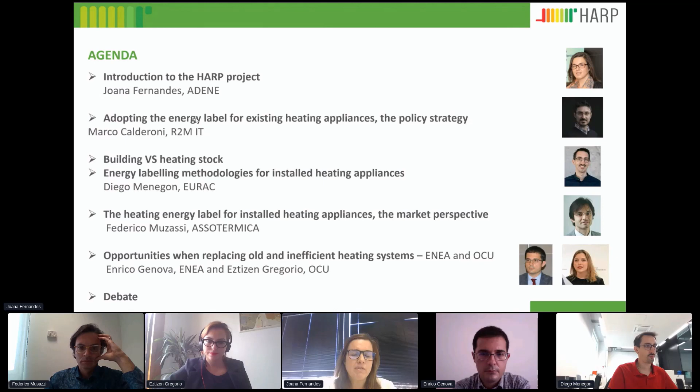After me, Marco Calderoni, who I hope can join us as well, or hopefully he's already in the chat. I can't see his face, but hopefully he's from R2M, so he knows how to manage around this online seminar. He will present the policy framework behind the adoption of a label for existing appliances. There you have it. Ciao, Marco.

After Marco, we'll have from EURAC, Diego Menegon, who will present two slots. He will present the work that EURAC did regarding the evaluation of the current building and heating stock at EU level, and then present the HARP methodology for labeling existing appliances, both space heating, water heating, and combi systems. Upon EURAC's presentation, we'll have with us Federico Muzassi from Assotermica, presenting the market perspectives from an industry association point of view.

And how the label for existing appliances can further promote and boost the market and the rate of replacement of existing old and inefficient heating appliances. Upon that, OCU, a consumer association from Spain, with Eztizen Gregorio and Enrico Genova from the Italian Energy Agency, will share the floor to present some of the opportunities consumers have when replacing old and inefficient systems, from a perspective of how to raise consumers' awareness, and then also the incentives in place, in this case specifically in Italy, that also support consumers to take action and replace their heating system.

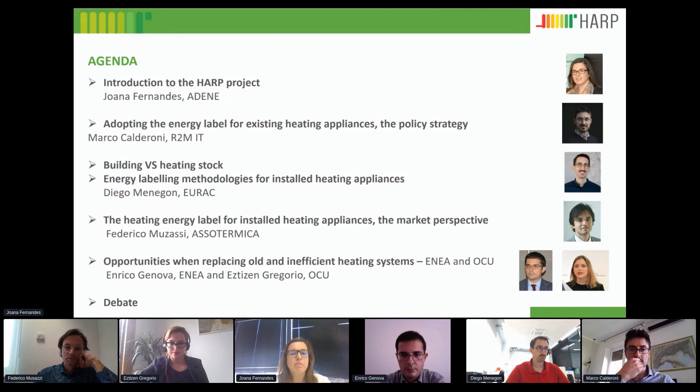So I will briefly present the HARP project. As I said, the HARP project basically is aligned with the EU strategy, with the climate package, and for having a strong activity and a strong action regarding the greening of buildings, and how we could not only work towards more efficient buildings, new efficient buildings, but also work with the large built patrimony that we already have.

And that is here, it's our stock, it's our identity, it's our patrimony, and we should also look into strategies to make this stock more efficient. So we already have several policy instruments in the market at the EU level that work towards this goal. We have the Energy Performance of Buildings Directive, which is in place in all EU countries, and of course assesses the energy performance of buildings. We have the renovation wave, a clear driver for the energy transition.

Long-term renovation strategies is also part of the packages, and most EU countries already have in place long-term renovation strategies for their buildings on how to tackle deep renovation in both residential and commercial buildings. And of course, we have the goal for nearly zero energy buildings. So the local production also has a goal that we have to meet our energy demands locally.

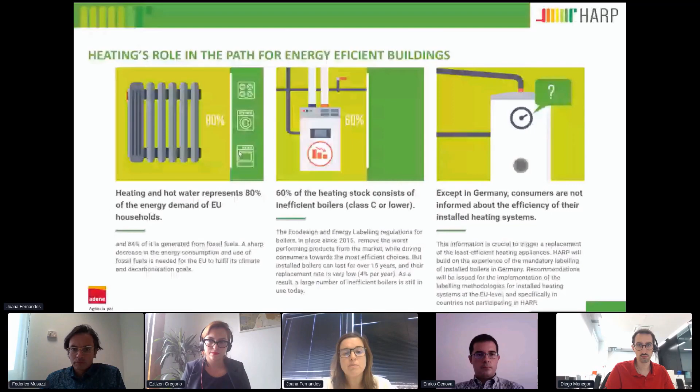So basically that is a waste of opportunity for the consumer to see what's out there, how the market has evolved, and what it offers nowadays. This is an opportunity that we don't think consumers should miss.

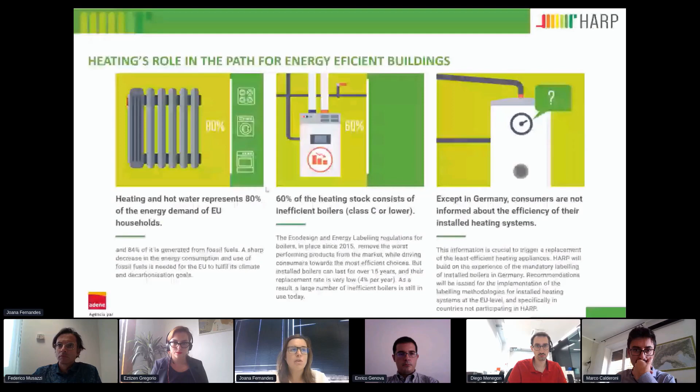For that, our efforts are towards inviting consumers to understand what they have at home. The first step of our HARP strategy is to raise awareness and to understand the consumer. In the HARP project, we had universities with us studying consumer behavior, to understand exactly what triggers consumers to think about efficient heating.

I know it's not a sexy topic, as one usually says, and it's not something that pops into your head, although we all had plenty of time to be at home in the past year and a half and tackled some issues we didn't think we were going to tackle before. But the truth is that efficient heating is not on the top of our heads at any moment.

So the first point is to raise awareness to the consumer about efficient heating, to let them know the efficiency of their current heating system, and make them aware of the possible solutions in the market to replace their heating system, analyze the benefits they can take from changing it, and of course motivate the replacement.

So put him in contact with installers, let him know which incentives exist at national level that can further support installation costs for new systems. And of course, make them aware of additional benefits that go beyond lowering your energy bill, but can also have a direct impact on the value of your house, the aesthetics of the solution, and of course your overall comfort.

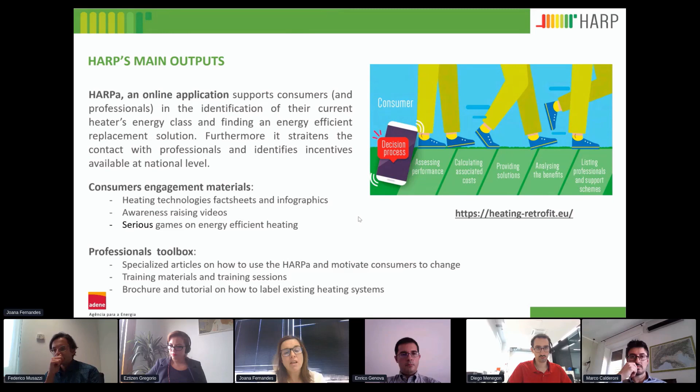We have also developed some materials for professionals to help them know how to use this methodology, how to use this application, and how to use the energy label for existing heating appliances in their business model, to support their service towards the consumer with this energy label.

We had already had one heating season during the project, and we are now entering a second heating season, and will start with the campaign very shortly. For those of you in any of the 5 participating countries, you can follow us on our partners' networks to see which activities we will be developing at the national level, because there will be public awareness in conventional media, communication with national authorities and stakeholders, social media campaigns, and of course trainings for professionals.

So what are the results we aim to achieve and work for in the HARP project? The first is, of course, the definition of methodologies that allow us to calculate the energy efficiency of existing heating appliances, and providing an energy class harmonized with the EU regulations that were published in 2013, entered into force in 2015, and are now already being revised, also in the framework of the rescale label.

These methodologies are harmonized with the EU label. That's the important message: that within the same language, within the same basis, we can talk with the consumer and present solutions that all have the same basis. We have a class for the existing system, and the same scale is used for new appliances available on the market. This is exactly one of the main outcomes of the HARP project.

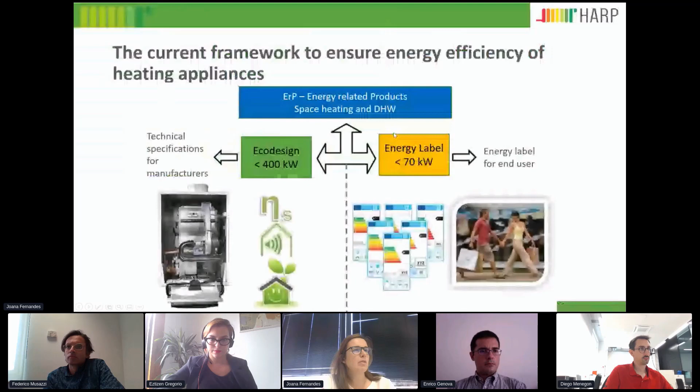Thank you, Joana. So today I will present two activities that were carried out in the plan, analyzing the building stock compared to the appliances stock, which are motivating some of the purposes of the project that Joana already explained. If you can go to the first slide. The idea of this activity was to characterize the heating appliance stock, so the installed appliances inside the countries.

That are project partners of the project HARP, named France, Germany, Italy, Portugal, and Spain, and the aggregated results of EU28. For time constraints, I will present today only the data about the European level, but in the public report you can see the results for these different countries. So the goal of this activity was to identify the most common solutions that are installed according to different building typologies. Therefore, we analyzed the stock in terms of age, capacity, efficiency, and expected energy class, and so on.

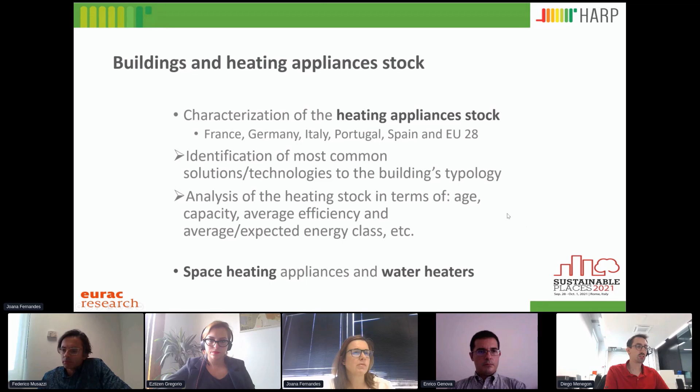We consider the space heating appliances and also the water heaters. Next, please. Okay, so if we look at the EU28, this data was taken from the deliverable that was written 1.5 years ago, so the statistics are not updated to 2021, but are some years old. In Europe, there are 500 million citizens with 22 billion square meters of residential area. On average, in Europe, 80% of the surface area is heated.

This statistic is really different if we look at warmer countries versus colder countries. For northern countries, the percentage is close to 100, and in Mediterranean regions, this percentage is much lower. This area is divided into 250 million dwellings, and let's say half are single-family houses and half are multi-family houses. The heated area in this case depends on the kind of houses. A really big percentage of buildings were built before 1980, so the thermal load can be important for this building stock.

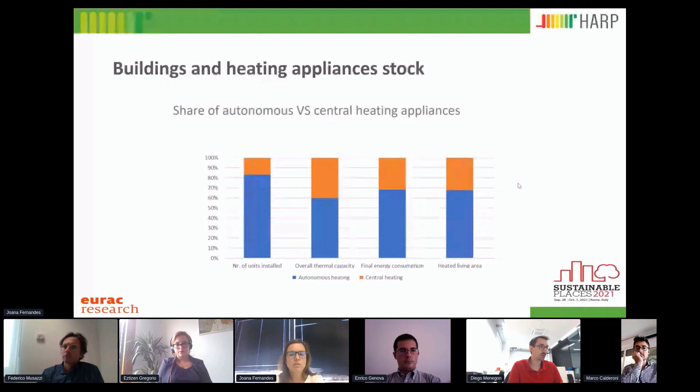So before we spoke about the overall number, and now we make an additional step. We need to understand how these appliances were installed in terms of autonomous heating or central heating, because the purpose of this project is to motivate the consumer. In the case of an autonomous heating system, the user is responsible for replacing an old and inefficient appliance, while in central heating there is a condominium administrator or some other person in charge. We see that the biggest share is installed in autonomous heating systems, which also corresponds to smaller units. In fact, in terms of thermal capacity, the share is half and half.

Looking at the water heater stock - one thing I didn't mention in the previous table is that heating was also combined with water heaters. In this slide, there are only dedicated water heaters. When a water heater is installed in one dwelling, the most common solution is an electric storage water heater, and then the second part of the share is gas instantaneous water heaters.

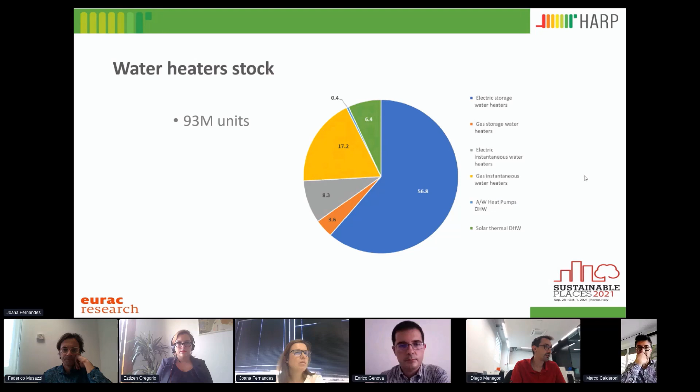Also in this case, we analyzed the installed capacity and the final energy consumption, and we see that although electric water heaters cover a big share of installed units, there is a large energy consumption by gas water heaters.

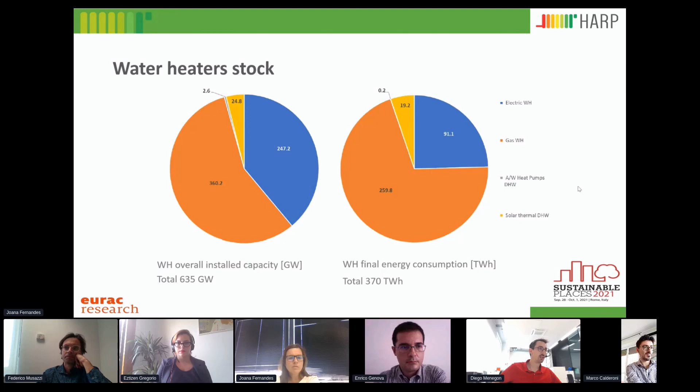So, as I told before, I present just the European aggregated data. If you would like more detail about the share in different countries, in the resource page of the HARP internet site you can find the deliverable with all this data, and also other data.

Okay, so the next step is the methodology for defining the energy label for installed appliances. This activity had the purpose of defining an energy label for space heating and water heater appliances. Since the energy label directive has been applied with the two regulations, 811 of 2013 and 812, and most installed appliances predate the implementation of this regulation, the user doesn't know the energy class of the installed appliance.

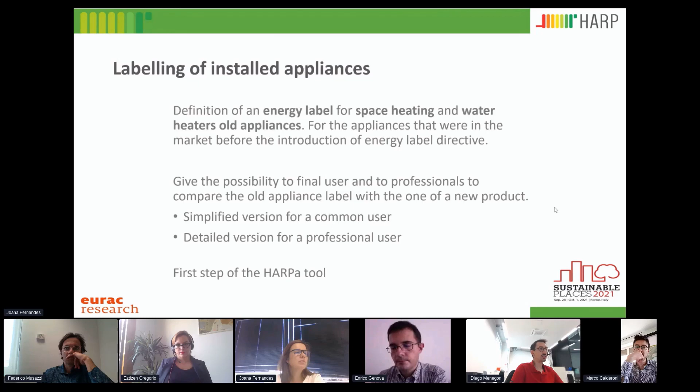So, looking at the aim of the project, we developed two possibilities to reach the final user. We developed a simplified version of the calculation for a common user, while we also give the possibility for a professional user to make a detailed calculation. The methodology developed has also been included in the HARPa tool.

Okay, so the idea was to define the same calculation that is implemented for new appliances, so that the comparison of old and new appliances is made on a common basis. To consider the seasonal efficiency of installed appliances, we took the calculations required in the European regulation. We perform the same calculation, but we also consider a degradation effect due to the aging of the components of the heating system.

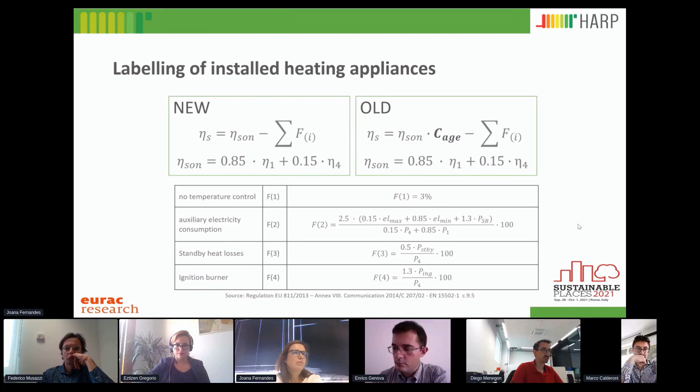The degradation rates were defined in cooperation with the manufacturers, and also looking into the literature. Since different appliances are based on different technologies, there can be a different effect of age. Typically, for a boiler, the literature says a lifetime of 20 years, while a heat pump is 15 years. The components inside the appliance are also different, so we consider a different aging coefficient depending on the heating technology.

From our analysis, we saw that in most European countries maintenance is mandatory, but not in all countries. Specifically in Portugal, the user does not have to perform mandatory maintenance, and we included this effect. For example, with a boiler, if you don't clean the burner or the chimney, it will perform in a worse working condition.

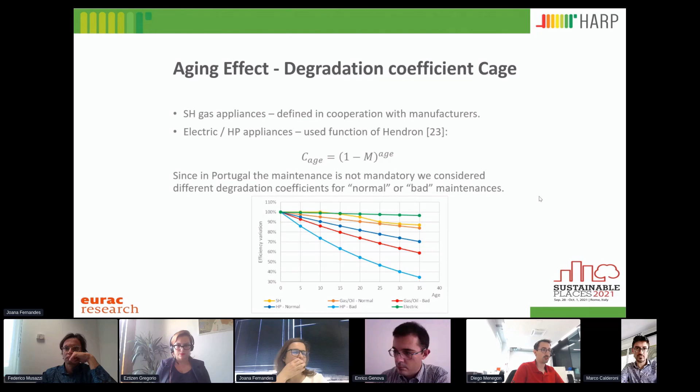Looking at the calculation, as I said in the introduction, we have two flows. Now I present the heating appliance label, and later the water heater label. There are two ways: one simplified for the final user, where we just ask which kind of boiler they have, the age, and if known, the nominal capacity, otherwise we use default data. For the detailed calculation, we ask the professional user for specific data of the appliance, such as full load and part load efficiency, electrical consumption, and so on.

For the common user, we use the default values developed inside the project. From the calculation, we take as output the seasonal efficiency and the energy class, with respect to the equation shown in the previous slide.

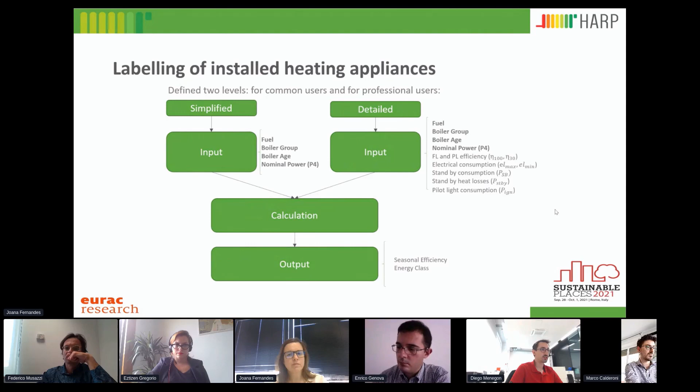The validation was done by collecting data for about 5,600 models through the different partners of the project. We considered gas and oil boilers built between 1972 and 2019. The classification is done according to European standards, so the possibilities are a standard boiler, meaning a really old appliance, a low temperature boiler, or a condensing boiler, which is the only kind you can find now in the market.

This was completed with a laboratory test where we compared the different values from the default calculation performed for the common user, the calculation performed by the professional, and the measurements we made in the lab. We got one oil boiler taken from a real application after 31 years. Before, I said that typically in literature boilers have a lifetime of 20 years, but you can see that often users have a much longer extension of the age of the boiler.

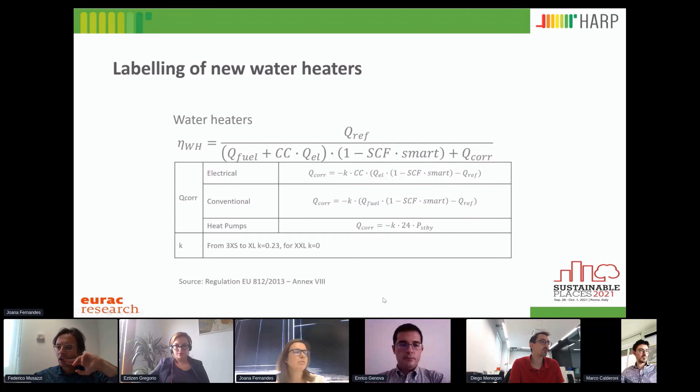For the water heaters, we consider the same approach. In this case, I have one slide for new water heaters and another for old water heaters, because the equation is too long. This is the water heater efficiency calculation for new appliances. For old appliances, we consider that they do not have a smart function, so the part of the calculation considering the effect of smart control is removed. Also in this case, we added the aging coefficient, as I mentioned before.

In this case, we again have two ways: one simplified and one detailed calculation. We ask the user about the water heater type, age, and number of inhabitants. Typically, appliances are sold considering tapping profiles that go from XXS to triple XL, but this is something the final user is not usually able to understand, as I will explain later. For the calculation, we need a different approach for different water heater types, because the physics behind the models is different.

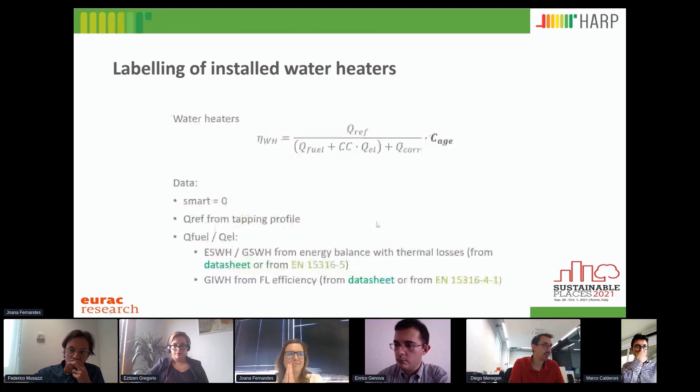Okay, from this calculation for all the water heaters, we got the water heater efficiency and the energy class.

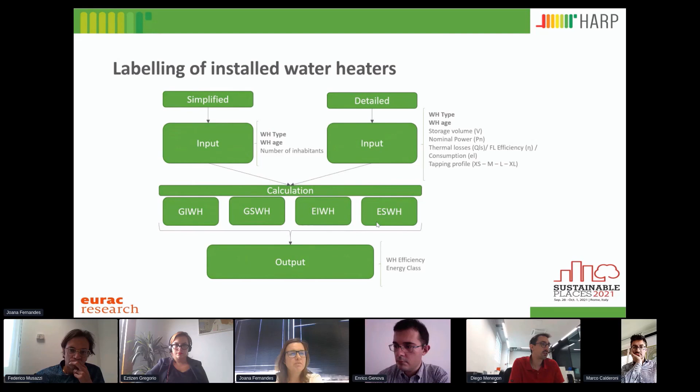The different tapping profiles define a different energy consumption for domestic hot water purposes, and we map this energy consumption to the number of inhabitants. The M profile is a water heater tested with a statistical draw-off of hot water that extracts 5.85 kilowatt hours per day, corresponding to a consumption of 2 people. If the user selects 1 or 2 people, we assign the M profile, and so on.

With the L profile, we consider between 3 and 5 people, and the same approach applies for other numbers of inhabitants.

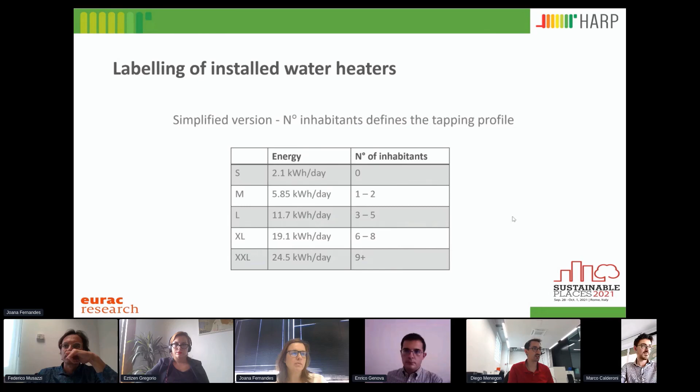Since the kind of water heater defines the default values, we took from a market analysis 200 electric storage water heaters and 200 gas instantaneous water heaters. If you remember the slide about the stock of water heaters, this represents about 80% of installed stock. We took the parameters needed for performing the calculation.

As I mentioned before, 2 persons correspond to an M profile. If the user selects electric storage water heaters, the calculation considers a volume of 100 liters and a capacity of 1.5 kilowatts. If the user selects gas instantaneous water heaters, that means an appliance with a capacity of 19.5 kilowatts. These are average conditions that need to be considered for the default value.

The same tables are also used for electric instantaneous water heaters and gas storage water heaters, which are the two other kinds of technologies considered in the calculation.

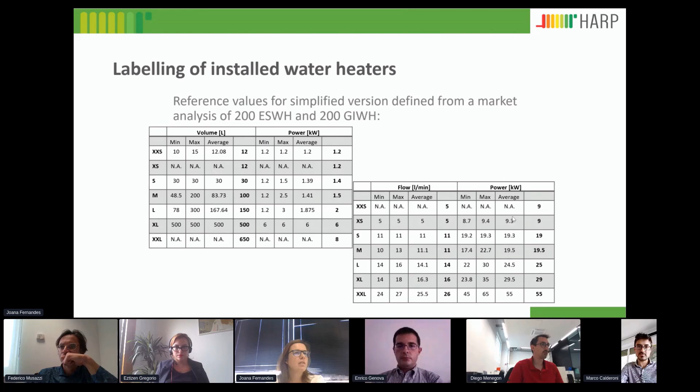In this case, we also performed a validation, comparing the simplified approach and the detailed approach with the efficiency of the water heater read from the product fiche.

In the case of electric storage water heaters, we weren't able to retrieve data for heaters older than 10 years. So we verified that the correlation works well also for new products, and the older products were simulated considering that during the technological evolution, manufacturers worked a lot on the insulation of the storages. We considered that older water heaters had higher thermal losses, as written in a standard that we also used for the calculation, and we saw that the calculation works well in that case too.

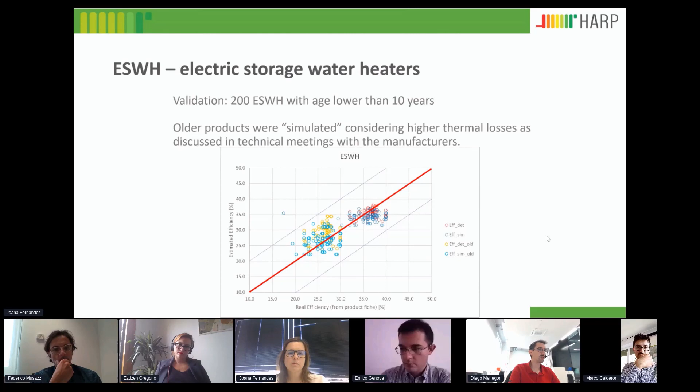Next slide. Okay, so in this case we also performed a laboratory test of 2 old water heaters, both gas instantaneous water heaters, one 22 years old and one 10 years old.

The 2 models are different, and we can see this effect. Here I added the full load capacity and the water heater efficiency. In the simplified and detailed calculation, we consider the aging effect, while in the measurement we didn't add the aging effect in the calculation because it was accounted for by the work done in the real application.

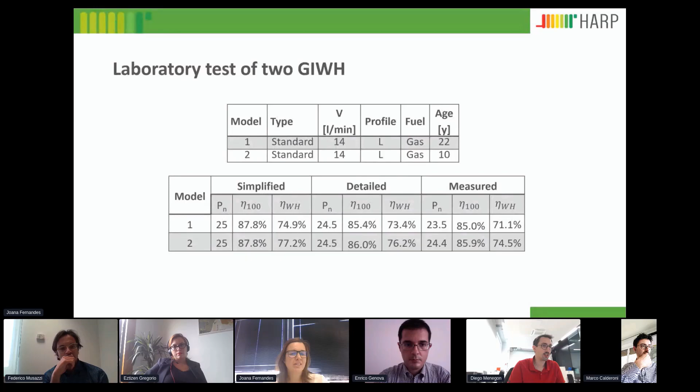Okay, so we lost also Joana. Today is not easy.

I will share the last. Joana is not with us anymore. Non c'è più. I was just concluding. Maybe I was so boring that she left. I don't know.

So also for these two activities in the HARP site, you can see the two deliverables. One is the full validation, and the other one is the guideline for implementing the calculation.

So now we have back Marco, so maybe we can go to the step before that was foreseen. So your presentation, Marco.

Yes, in principle. First of all, you can hear me now, right? Yes. Okay, it was my laptop, it was not supporting the system apparently. But the problem is from my mobile, I cannot share the presentation. Okay, so that's a big issue. Do you happen to have the very last? Okay, here's Joana, I can do it. Sorry, I'm back, everything crashed. But sorry, I think I can try to share again.

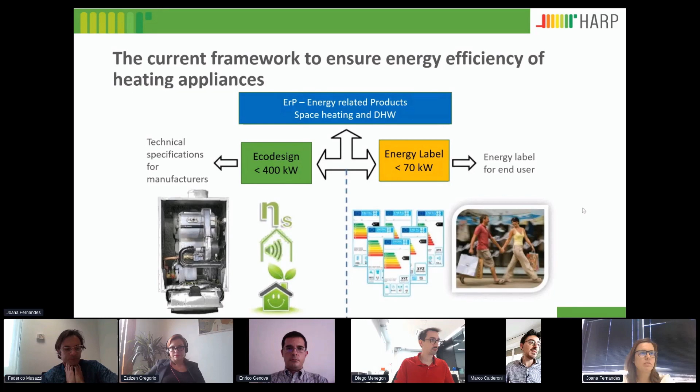Thank you for changing the slides. So now these are just the detailed numbers. Press space or anyhow the mouse button please. The problem is what happens with the installed appliances, and this is, as Joana already explained, and also Diego, why HARP was born. Next slide please.

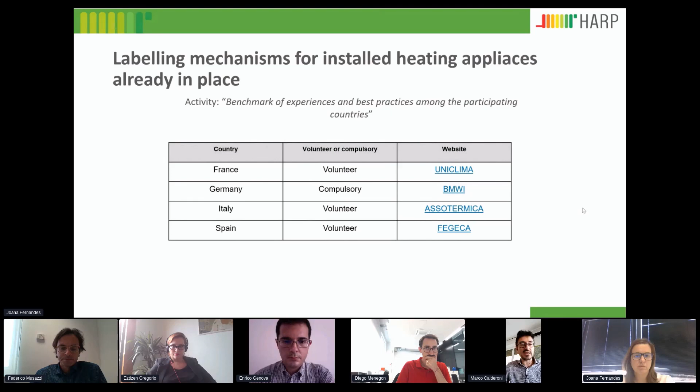So let's say the interesting part of this presentation, in my opinion, is that HARP is not inventing anything from scratch, anything new. Such initiatives - I mean initiatives about labeling existing installed appliances - are already in place. But apart from Germany, those are actually privately initiated experiences. So in France, we have a voluntary labeling system. In Italy, we have a voluntary one. In Spain, we have a voluntary one. In Germany, it's partially compulsory, and this was born as a mechanism pushed by the government, by the German Energy Agency. In the other countries, it's managed by the industrial associations.

Okay, great, now some information about those mechanisms in place. So again, those are initiatives which build the framework and the tools required for certain stakeholders - usually installers, chimney sweepers, or even the end users - to be able to rate the efficiency of any installed heating boiler. Of course, in those cases, most of the boilers tend to be older than 2015, when energy labeling came into place, so those do not have an energy label. And the idea is to try to figure out and put in place a mechanism which tells the users how likely inefficient their old boiler is.

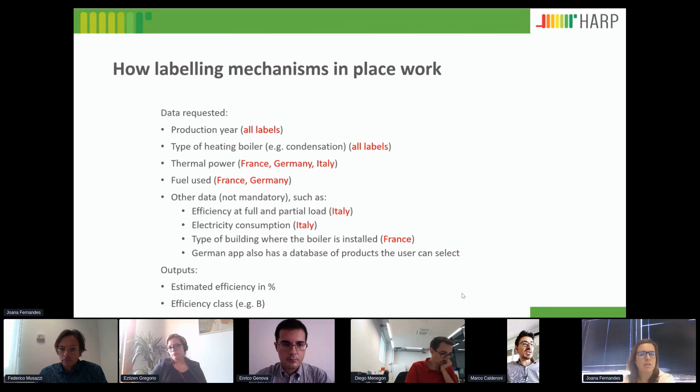This was the overview of what is already in place. Why did I provide you with this overview? Because I think it clearly shows why a project like HARP has been financed and is now ongoing, because this is anyhow happening. The big challenge now is to build, to the extent possible, a common framework and make it as uniform as possible, and collect experiences and lessons learned, and amplify the message. What we're doing now in HARP is understanding the frameworks in each of the countries I mentioned, in order to understand the minimum regulatory and legislative conditions for such a mechanism to be in place.

How can a government, be it national or local, improve the regulation so as to simplify the introduction of such a mechanism for labeling installed heating appliances? We're looking at this from the technical perspective, the procedures. How does the mechanism work, especially in Germany, where it is governmental? It's interesting to understand how it works from the procedural perspective, the policy, and also the markets might be relevant. How is the market in each country for heating appliances?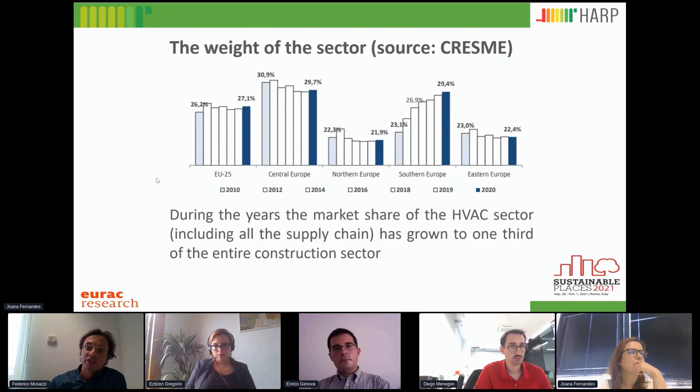That's a very huge number, and it also means that what we install now we will have also, as Diego said, for the next 12, 15, 20 years. So if we speak about energy efficiency targets for 2030, or European objectives on the Green Deal, what we sell now will define the achievement of the results in 2030. So it's very important to consider what we have on the market at the moment, and to choose the best option possible.

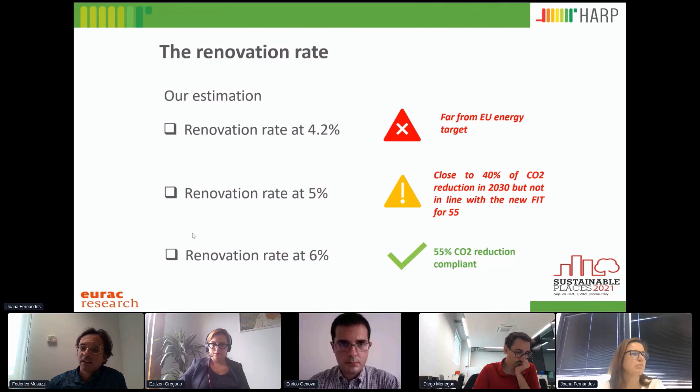How to do that? There are different drivers to change the mix on the market. In the last few years we experienced a big change on the market. A few years ago, the most common technologies were standard boilers with very poor efficiency. Now the mix proposed on the market is quite good, in the sense that we have all the technologies I showed you before. And the main drivers can be divided into three types of actions.

We have new vertical standards and product requirements, for example the eco-design regulation, the energy labeling regulation, specifically for a single sector, for example the heating sector. These are effective because they fix precise limits for appliances put on the market, so new appliances have to respect the new limits of the new standards and product requirements.

The second type of action can be defined as system requirements, not specifically for a vertical sector but for a system. For example, the EPBD, Energy Performance of Buildings Directive, or the Renewable Energy Directive, which push in an indirect way the putting on the market of more and more efficient technologies.

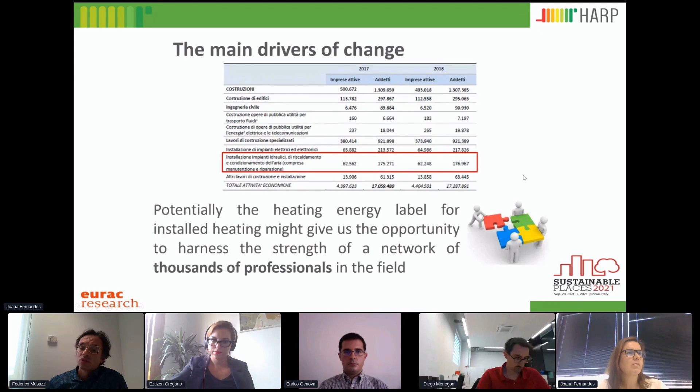So it was a very brief presentation, but I hope to have passed on the most important message from our side. And of course, I'm available for any questions also later on. Thank you very much.

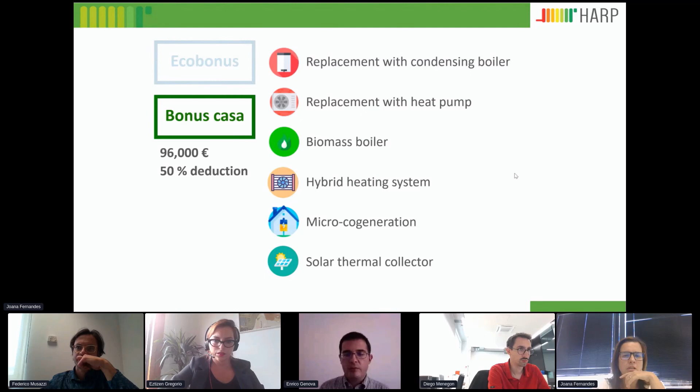In Ecobonus, you consider not the limit of expenses, but the limit in deduction. Moreover, while Bonus Casa has only one limit which includes all renovation measures you are carrying out, Ecobonus has different limits according to the measure you are considering. So for each measure, for each technology, there is an amount of money available for deduction.

For example, for the installation of a biomass boiler, you have the possibility to deduct up to 30,000 euros. This means you can spend up to 60,000 euros, and you will deduct half of this sum, so 50%. For other measures, the percentage of deduction is 65%, which is the majority of the technologies, as we can see in the next slide.

Actually, the picture is more complex because we should consider also the envelope. But this is very quickly the mechanism of Ecobonus for heating, for the replacement of heating appliances or installation of new appliances where renewable resources are considered.

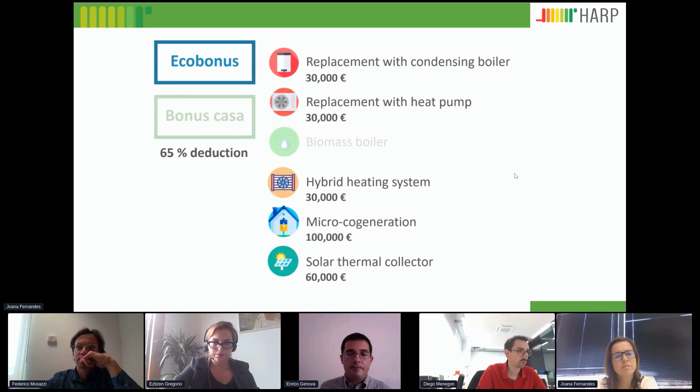These deductions were created several years ago. Bonus Casa was created in 1998, and then was reinforced in 2012, while Ecobonus started in 2007.

Last year, because of the pandemic, the Italian government decided to start another program of incentives called the Superbonus. Superbonus is made of two main chapters: one focused on the structural reinforcement of buildings, and the other on the energy improvement of buildings.

This second chapter supports roughly the same measures as Ecobonus. The mechanism has several similarities, but of course, since here the deduction is much higher, 110%, requirements are stronger.

So you have to respect all the regulation requirements related to the energy performance of buildings, the additional requirements for Ecobonus, and also another requirement: the set of solutions you decide to carry out, which are supported by Superbonus, must achieve an improvement of at least 2 energy classes of the building.

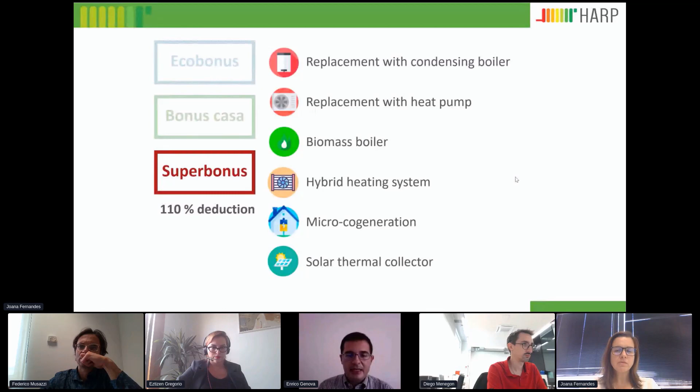Of course, these incentives are considered strategic by the Italian government, and as we can see in the next slide, they are considered in the National Energy and Climate Plan.

Since this is a strategic action for Italy, it's important to collect data and to monitor these initiatives, these incentives, and their results in terms of energy efficiency.

So ENEA, which has the role of National Energy Agency for Italy, every year collects data about the number of installed units, investment costs, energy savings estimated for each installation, etc. These are reported every year in an open access report, so can be read by everyone, and is dedicated to public authorities.